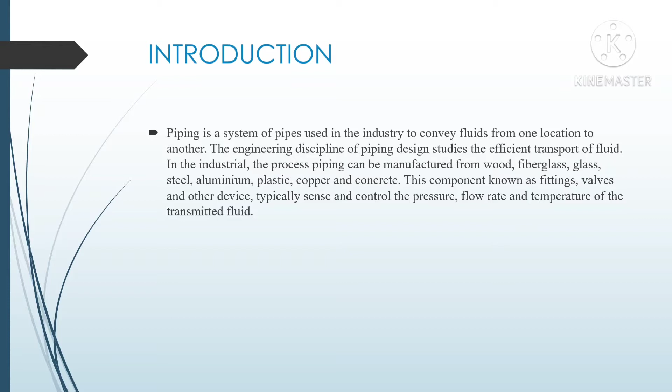Introduction. Piping is a system of pipes used in the industry to convey fluids from one location to another. The engineering discipline of piping design studies the efficient transport of fluids. In industry, process piping can be manufactured from wood, fiberglass, glass, steel, aluminium, plastic, copper, and concrete. Components known as fittings, valves, and other devices typically sense and control the pressure, flow rate, and temperature of the transmitted fluid.

Second, analysis of the pipe network is an analysis of the fluid flow through a hydraulic network containing several or many branches that are connected. The objective is to determine the flow rates in the individual sections of the network and the pressure drops. Once the pipe friction factors are obtained or estimated from the law of pipe friction, the measurement of the flow rates and the head losses on the network can be considered.

The head losses at each node are usually ignored, and a solution for the steady state flows on the network is found, taking into account the pipe dimensions, lengths and diameters, the property of pipe friction, and known flow rates or head losses.

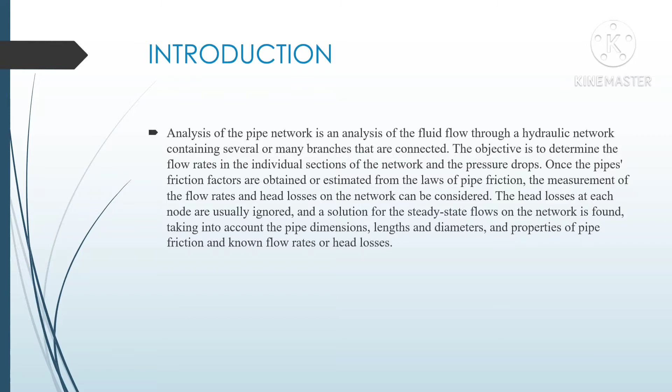Last but not least, the Hardy-Cross method is an iterative method for determining the flow in a pipe network system where the inputs and outputs are known, but the flow inside the network is unknown. The method was first published in November 1936 by its namesake Hardy Cross, a structural engineering professor at the University of Illinois at Urbana-Champaign. The Hardy-Cross method is an adaptation of the moment distribution method, which was also developed by Hardy Cross as a way to determine the moment in indeterminate structures.

The introduction of the Hardy-Cross method for analyzing pipe flow networks revolutionized municipal water supply design. Before the method was introduced, solving complex pipe systems for distribution was extremely difficult due to the non-linear relationship between head loss and flow. The method was later made obsolete by computer solving algorithms employing the Newton-Raphson method or other solving methods that prevent the need to solve non-linear systems of equations by hand.

The Hardy-Cross method provides a system for calculating the value of the correction to be made, each loop or junction being considered in turn and corrected, assuming that conditions in the remainder of the network remain unaltered.

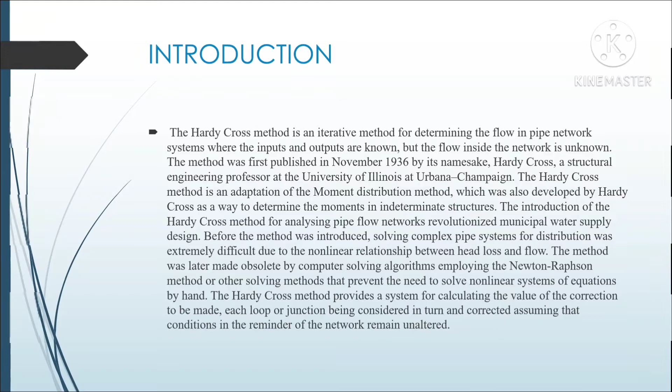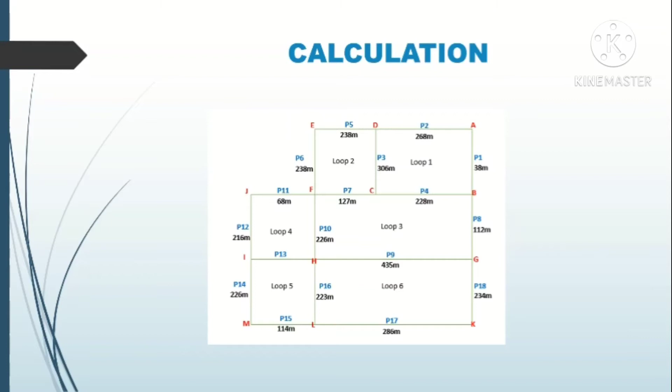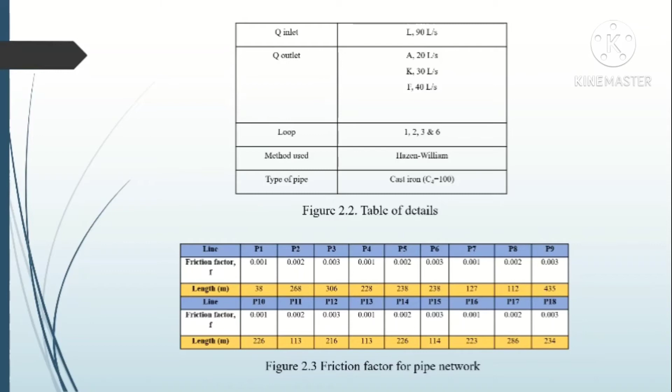Okay, for the calculation, the task given is we must use the Hardy-Cross method with Hazen-Williams in order to determine the discharge Q and head losses HF. Okay, below is the detail. This is figure 2.1, this is figure 2.2. In the table of detail, we can see Q inlet, Q outlet, loop, method used, and type of pipe. For figure 2.3, which is the friction factor for the pipe network, we can see line, friction factor, and length. And the last one is figure 2.4, which is the table of resistance in each pipe.

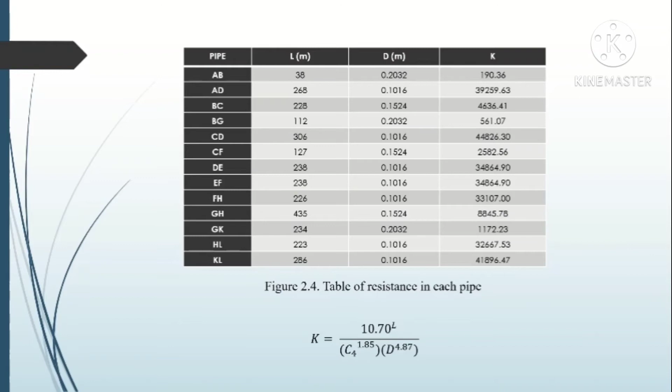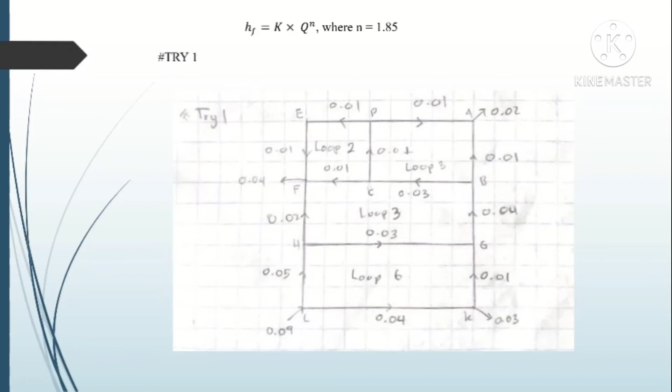Okay, in this project, we can use formula K, which is resistance. K equals 10.70 L divided by C to the power of 1.85 times D to the power of 4.87. As we can see, there is HF equal to K times Q to the power of N, where N is 1.85. Okay, for try one, this is the figure for try one.

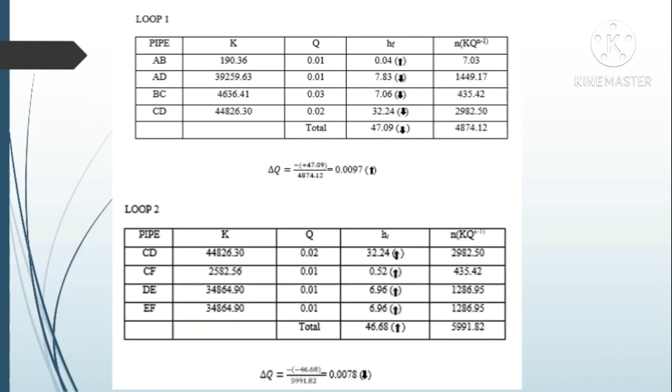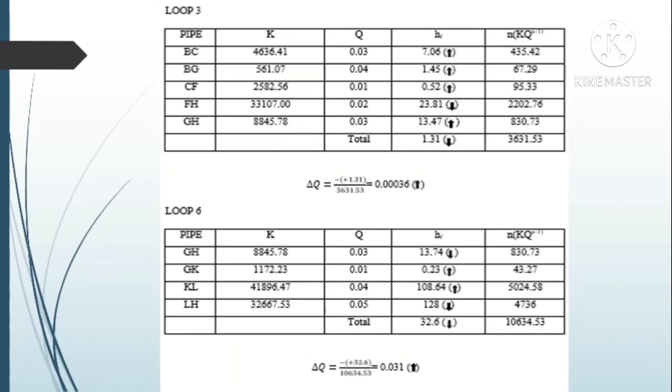For loop 1, after we use the formula, we get negative 47.09 divided by 4874.12, and we get 0.0097. For loop 2, we get 46.68 divided by 5991.82, and we get 0.0078. For loop 3, after we use the formula, we get negative 1.31 divided by 3631.53, and the answer is 0.00036. And the last one, which is loop 6, we get negative 32.6 divided by 10,634.53, and we get 0.031.

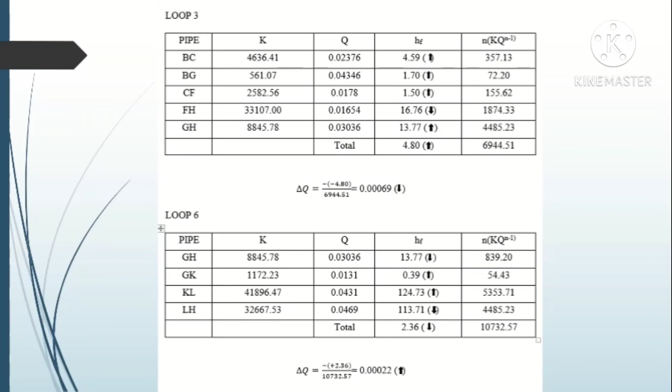Okay, for the second try, this is the figure for the second try. For loop 1 in try 2, we got negative 7.9 divided by 1508.96, and we got 0.0052. For loop 2, we got 34.37 divided by 2808.05, and the answer is 0.0024. For loop 3, we got 0.00069, and the last one, loop 6, we got negative 2.36 divided by 10,732.57, and we got 0.00022.

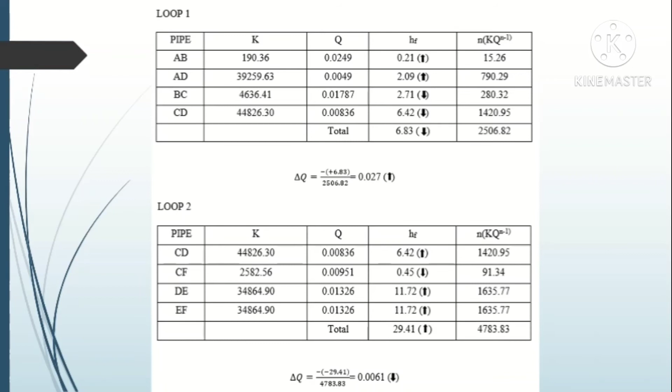Okay, for the last try, which is try 3, this is the figure for try 3. For loop 1 in try 3, we got negative 6.83 divided by 2506.82, and the answer is 0.027. For loop 2, 29.41 divided by 4783.83, and the answer is 0.0061. For loop 3, we got negative 0.24 divided by 3201.25, and the answer is 0.000075. And the last one, which is loop 6, we got 0.01 divided by 10,717.25, and the answer is near to 0.

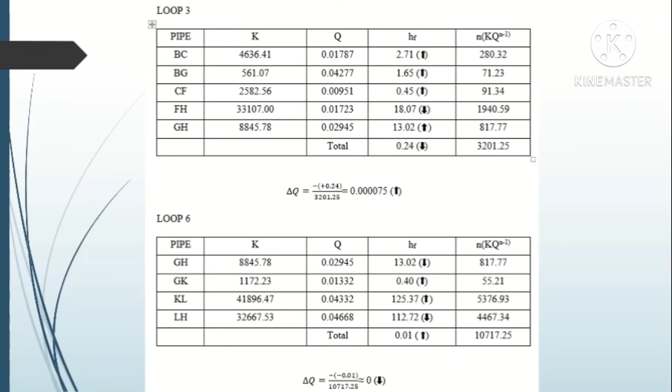Okay, the last part, which is the conclusion. In conclusion, the Hardy-Cross method with Hazen-Williams can help to determine the discharge Q and head losses HF in pipe network analysis. In this task, the method to solve the task was done as 5 trials. The last trial shows that the value of correction in the selected loop had achieved 5 decimal points. The results show that in trial 5, loop 2 and loop 3 got 5 decimal point values of correction, which are 0.00017 and 0.00065.

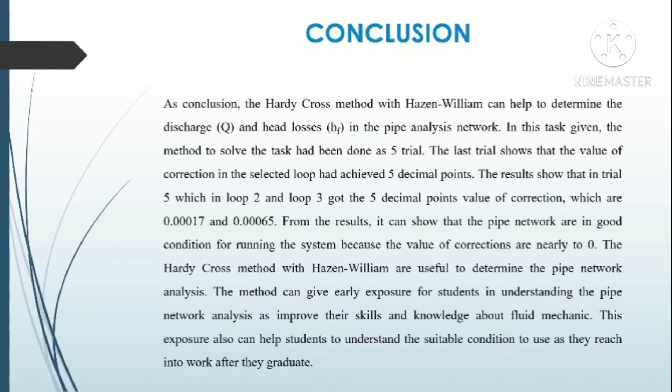From the results, it can show that the pipe network is in good condition for running the system because the values of correction are nearly zero. The Hardy-Cross method with Hazen-Williams is useful to determine the pipe network analysis. The method can give early exposure for students in understanding pipe network analysis and improve their skills and knowledge about fluid mechanics. This exposure also can help students to understand the suitable condition to use as they go into work after they graduate.